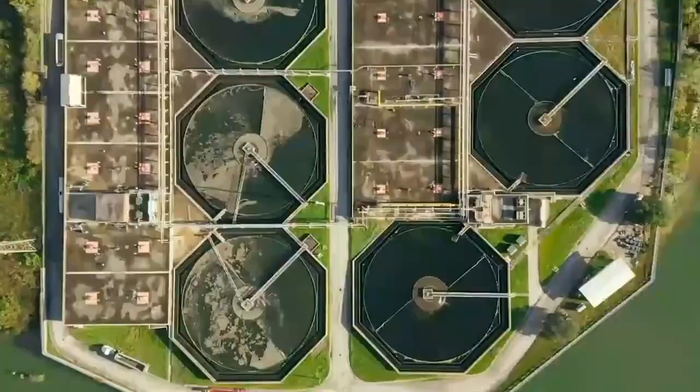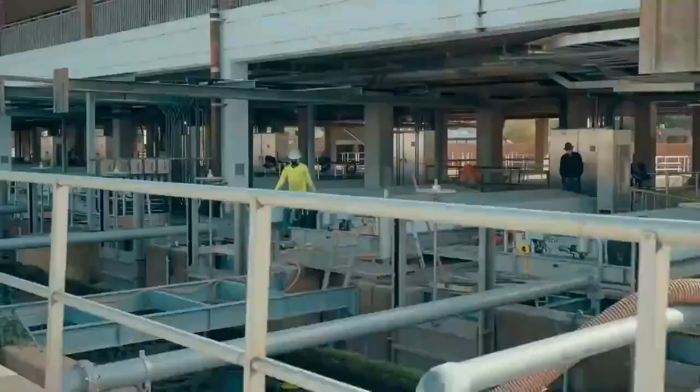Public Works is responsible for the daily tasks you may take for granted. You may not notice us, but we work around the clock to support you. We are the foundation for life in Houston.

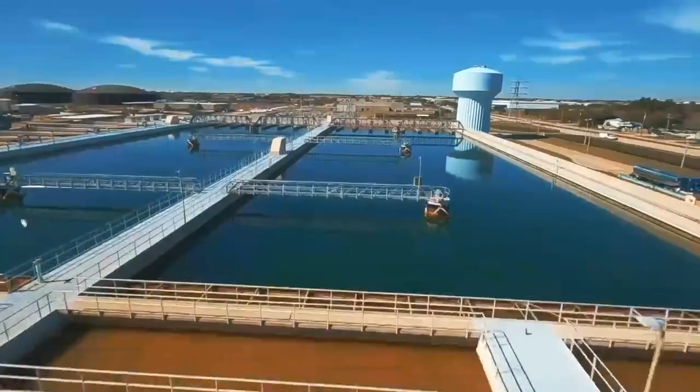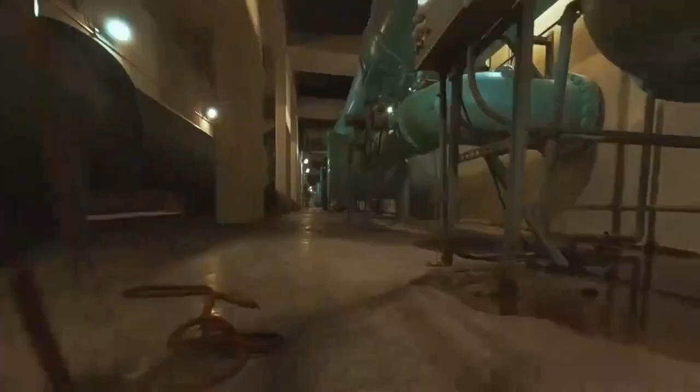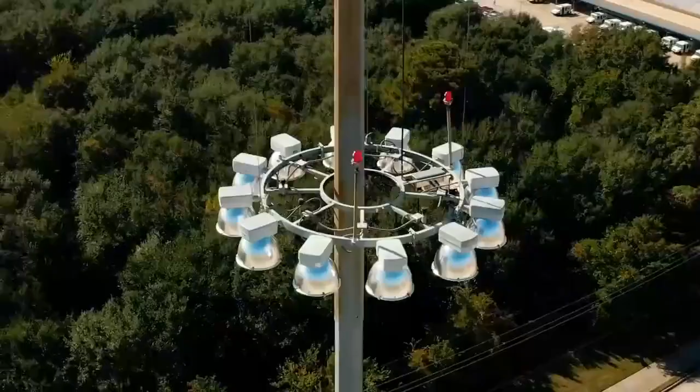Houston Water distributes enough fresh water to fill the Astrodome 4 times a day. Transportation and drainage operations handles 16,000 miles of streets, over 1 million signs and street names, and thousands of drains.

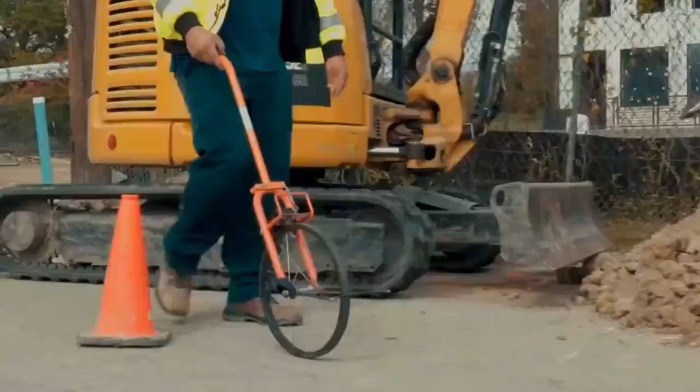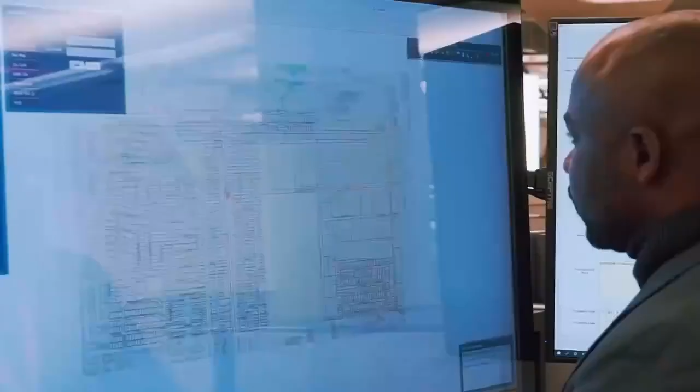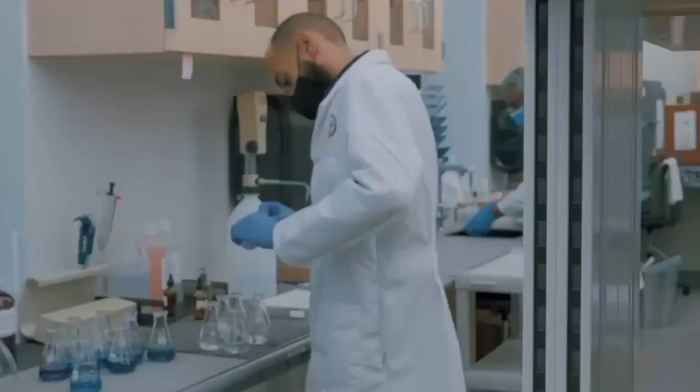The Houston Permitting Center regulates hundreds of projects so you can work, play, and live safely. Customer Account Services ensures 2.1 million people have access to safe drinking water with efficiency, accuracy, and flexibility.

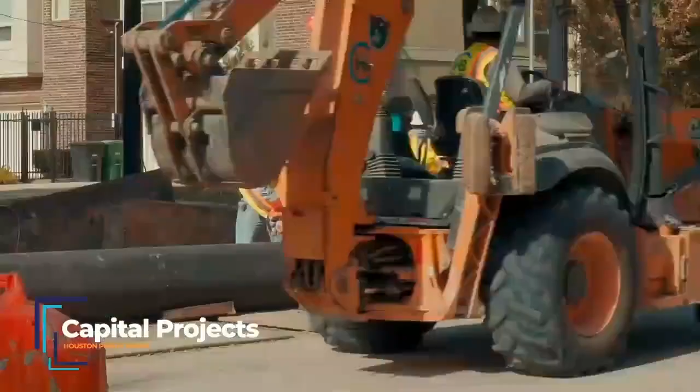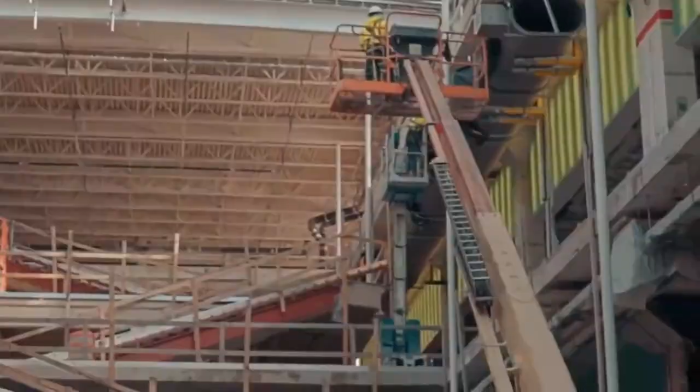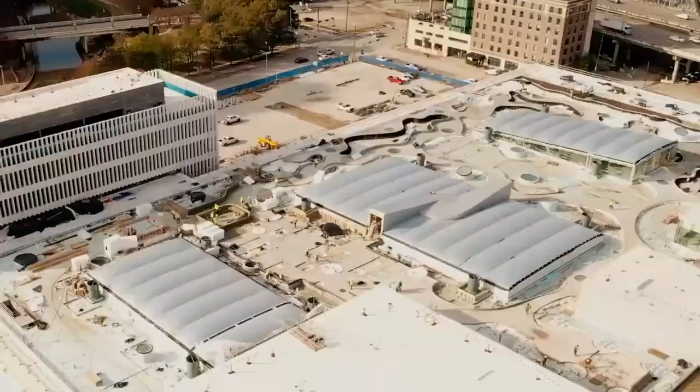Capital Projects manages the critical improvements that make Houston better every single day. Houston is always moving towards growth, innovation, and progress. We are the largest, most diverse public works organization in the country. We are one team with one purpose. Together, we create a strong foundation for Houston to thrive.

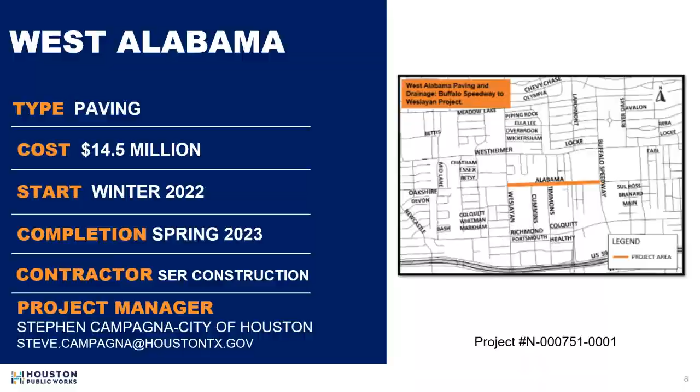Improvements include new street paving, sidewalks, and shared use paths, including safe pedestrian crossing at all signalized intersections. Updated lane configuration includes one westbound lane, one eastbound lane, and one two-way center turn lane with on-street dedicated bike lanes. There's also a new storm sewer system, water lines and sanitary sewer lines, widening of Timmons Lane north of West Alabama Street, and finally new traffic signals at Wesleyan Street, Timmons Lane, and Edloe Street.

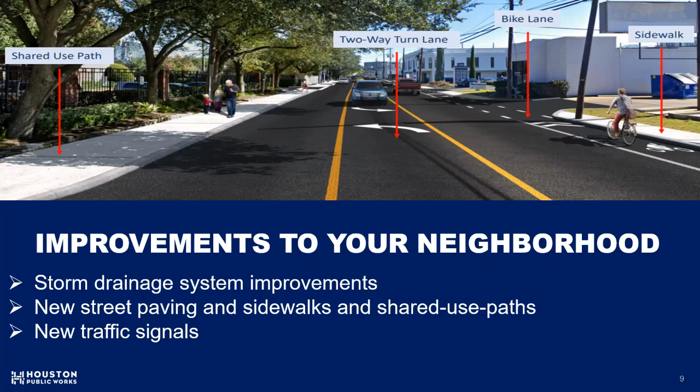As you can see here, by these numbers, this is a VIP, a very important project.

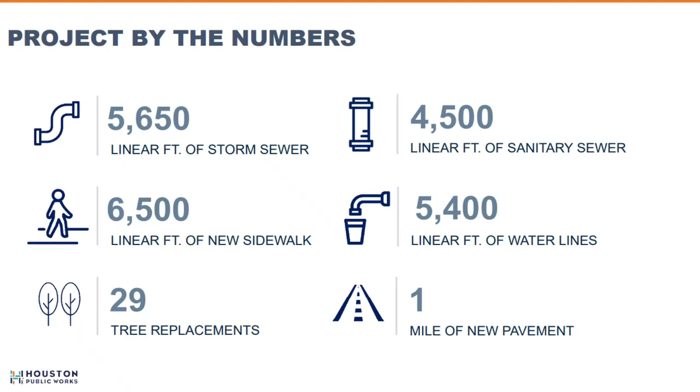Here's Exhibit 1, showing the existing and proposed aerial views of the West Alabama and Timmons Lane intersection. In the proposed design, you'll see the shared use path, bike lane, left turn only lane, and intersection safety improvements, all of which will include ADA compliant infrastructure.

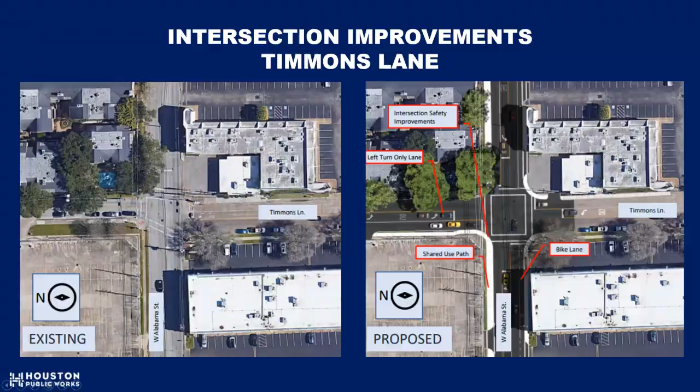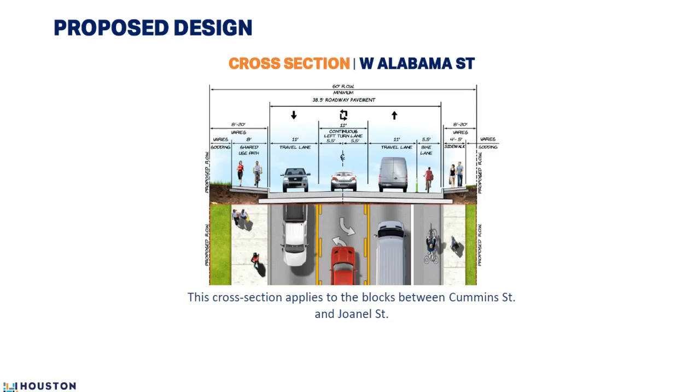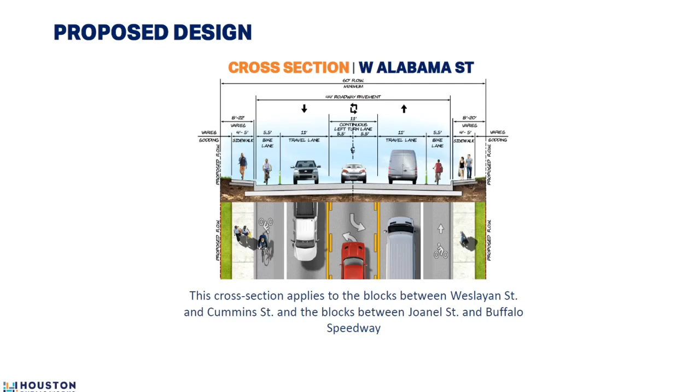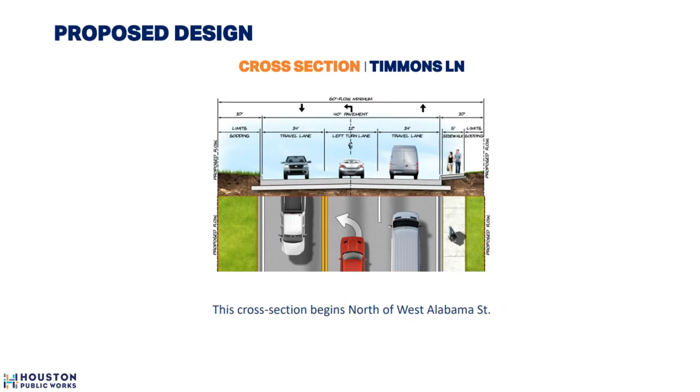Construction activities will begin in January of 2022 and last through May of 2023, which is around 16 months. The project will be divided into four major phases of construction.

Phase 1A, in green, will take place during winter and spring of 2022 and is for construction of the eastbound lanes on West Alabama from Wesleyan Street to Buffalo Speedway. Phase 1B, in orange, will take place during the summer and fall of 2022 and is for construction of the intersections on the south side of West Alabama.

Phase 2A, in blue, will take place from the fall of 2022 through the winter of 2023 and is for construction of the westbound lanes on West Alabama from Wesleyan Street to Buffalo Speedway. And finally, Phase 2B, in magenta, will take place during the winter and spring of 2023 and is for construction of the intersections on the north side of West Alabama, as well as Timmons Lane.

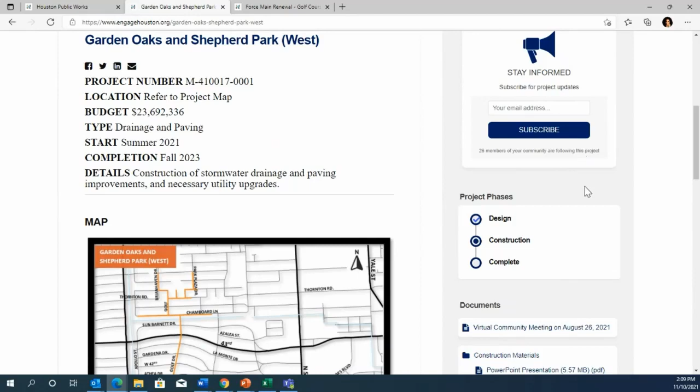You'll see the current project phase, as well as the project documents, meeting recordings, videos, and pictures underneath that. And of course, every page is going to show you who's listening and who the public engagement team is.

At the bottom of the page, there's the Engage Us tool, which allows you to correspond directly with us through this platform. In order to use this tool, you must be registered and signed into the site. Once you're signed in, you can ask questions, and they're sent directly to the public engagement team, and we research and provide a response to every single question that is asked.

The cool thing about this site is that not only does the original poster receive an answer to their question, they'll also be notified via email once there's a response. We wanted to also note that some of the questions and answers will be posted publicly so that others can view the conversation. We say some because in order to respect privacy, we don't post a question and answer if someone uses any personal information, but they still will get an answer and be notified via email.

Let's take a look at another project page. Another feature that is available is the Project Updates tool, which allows participants to get the latest information on the project. If they're subscribed, they'll be notified when an update is posted and can share that update to social media or via email. We are working on providing updates for each project so that we can continually keep the community informed and engaged.

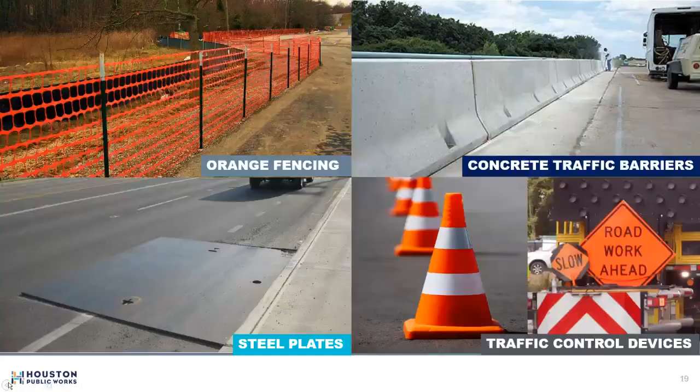Okay, you want me to go through that? Well, just in terms of clarifying the actual start time, which you stated is January 2022, and then the completion time—they're confused about when the project will be complete. If you can just restate that for them and confirm it. The planned completion is the spring of 2023. Okay, spring of 2023, gotcha. That answers the question. Thank you, sir.

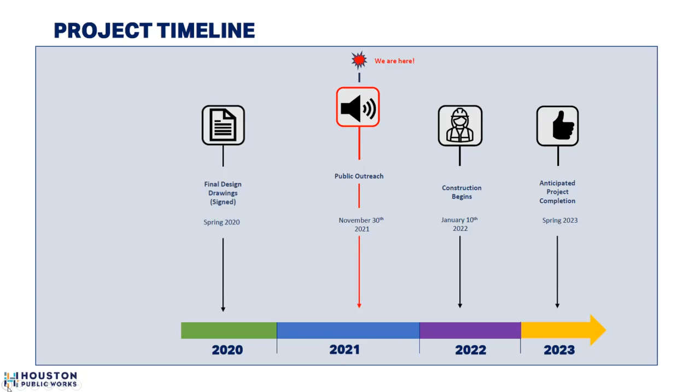The next question asks, will there always be access on at least one lane of West Alabama? That's a construction related question, so we'll keep it with the construction side of the project team. Actually, that's going to be a design question. Yeah, we're going to have at least one lane open on Alabama.

We intend to use high early strength concrete throughout this project to minimize any issues of only being able to use one lane at a time. So hopefully with that, we'll be able to move faster with high early strength concrete.

Thank you, Stephen, and thank you for the clarification of my mistake on that. Okay, and the next question is, well, they're wanting to know in terms of the duration of the project. Can you kind of speak to, they're saying why will it take so long to complete, but if you can break down for them what goes into starting and actually full completion of this project.

Sure. So the project length is approximately 3,300 linear feet from Wesleyan to Buffalo Speedway. The Buffalo Speedway intersection is not in the scope of this project. However, Wesleyan is, and that is going to be the outfall of our drainage system. So these drainage conduits are very deep, and consequently we have to have right-of-way width, which is very limited. It's a very compressed right-of-way in order to get our equipment in there and to install the utilities. And the utilities that are fairly deep are the storm and the sanitary.

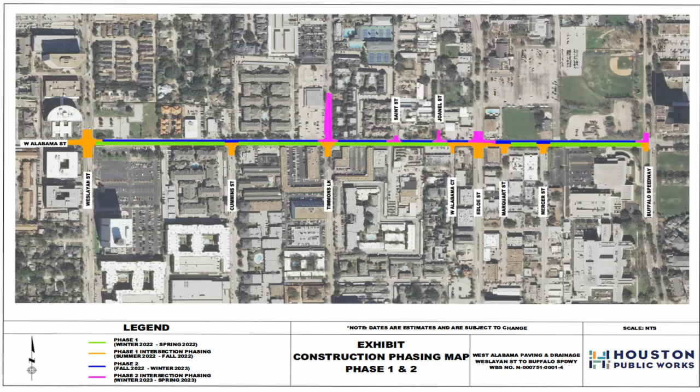Thank you, Tim. Thank you. Thank you, bye-bye. Thank you, Timothy. Bye. Thank you, everyone. Thank you all.